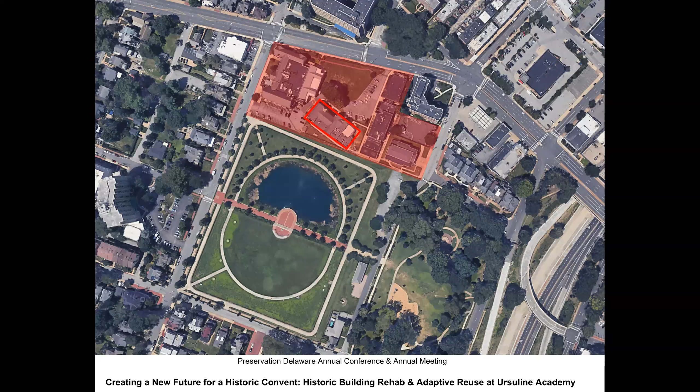The upper school was built in 1927, the building to the left on the former map. Lower school was a 1955-era building. The Montessori program was added to Ursuline's offerings in 1964. The gymnasium and middle school additions were done in the 1980s.

The PAC, the Performing Arts Center building, is a 1914 former Christian Science church that Ursuline Academy bought probably 25 to 30 years ago. They're in the process of figuring out what they need to do with that, what they can do with that.

The Student Life Center itself is a 3-story, 8-bay stucco over brick Tudor building with gabled structured roofs, wood casement windows with brick detailing around them. The west side of the building, to the right of the tree here, was a chapel on the first floor, which has been turned into a library as part of this renovation and restoration, with stylized Gothic cast stone detailing as an accent for that space.

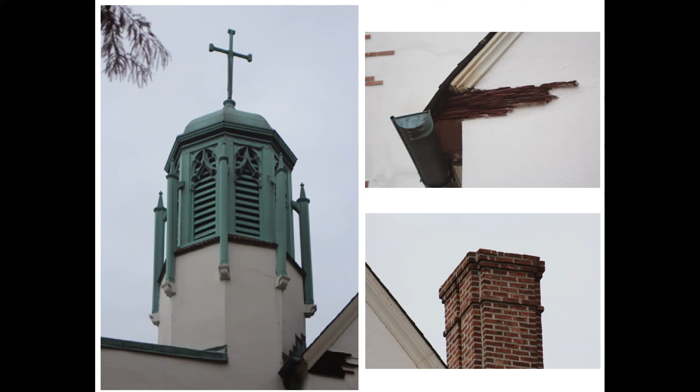Tax credit program eligibility is actually fairly simple. In Delaware, and I don't think this exists in every state in the union, Delaware is one of the states that offers a tax credit program for nonprofits. The standard for-profit tax credit program includes a 20% tax credit locally at the state level and a 20% tax credit at the federal level. The federal tax credit program does not, at least the last I checked, allow participation from nonprofit organizations. I think that's one of the reasons the state has offered this slightly more advantageous 30% tax credit for nonprofits within the state.

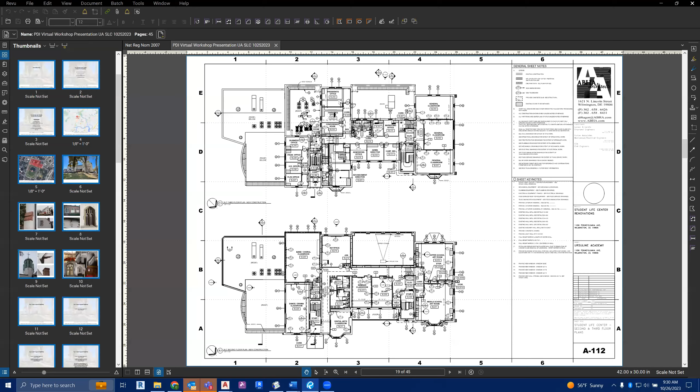Preservation design and approach. I'm going to duck out of the presentation view for a minute so I can scroll around on these drawings. I'll jump back in when I need to.

These are the drawings prepared by ABHA architects for the project. They were the architects hired by Ursuline Academy to perform the services on the renovations and additions.

Essentially everything from this vestibule here to the left of the sheet, with the exception of the band music room which was a 1980s addition, along with a porch that projected off to the east of the existing exterior wall, was the original house that sat on this property when John Raskob bought it and donated it to the Ursuline sisters.

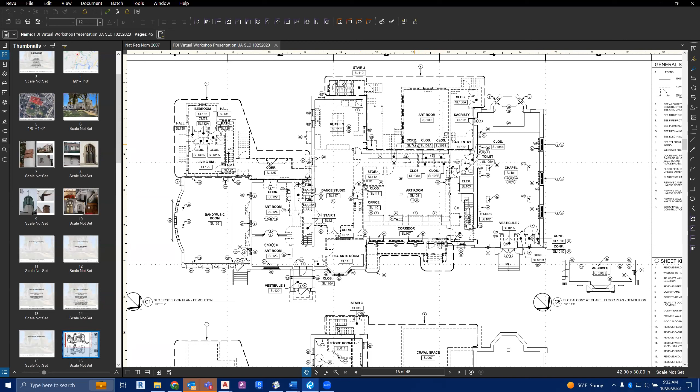You see there are several areas of somewhat major demolition—later additions to the original building. The band music room was probably the latest of those additions; because of its size and location, it was decided to leave that in place. There was a small residence building, an apartment building if you will, to the south of the building that was demolished, and then an existing art room and a sacristy that serviced the chapel were also later additions demolished as part of this renovation project. You'll see a little bit later why that demolition was proposed and accepted by the SHPO.

Not sure why it's not advancing. Hold on one second.

I don't know why it's not advancing now. Technical difficulties abound. There you go.

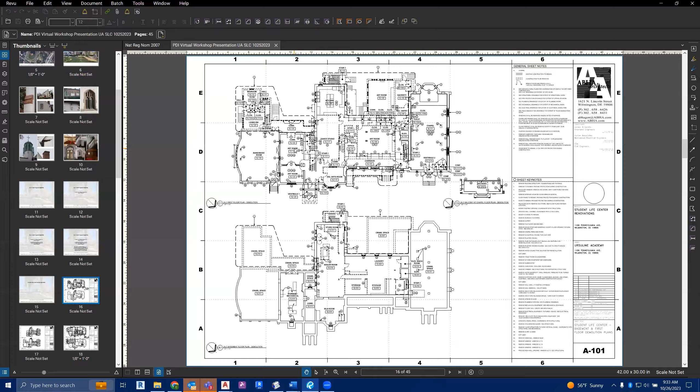The next sheet of drawings from ABHA shows demolition on the second and third floor plans. Essentially the interior partitions were demolished almost in their entirety. The program for the Student Life Center included classrooms, music rooms, and small individual bedrooms or apartment units for each of the Ursuline sisters. We just couldn't reuse them in any way, so there was a fairly wholesale demolition of the interior partitions. The exterior of the building stayed intact as it was, except for those two areas of demolition I talked about earlier.

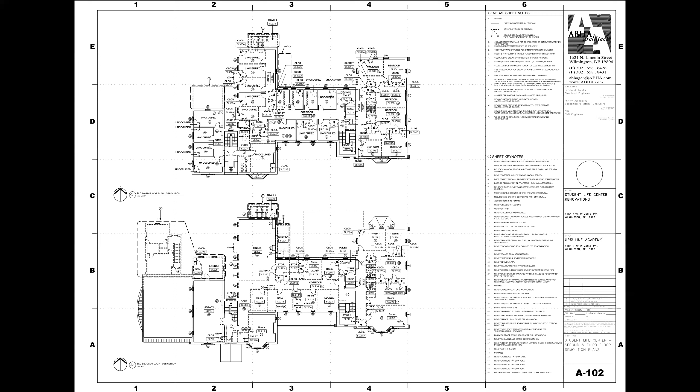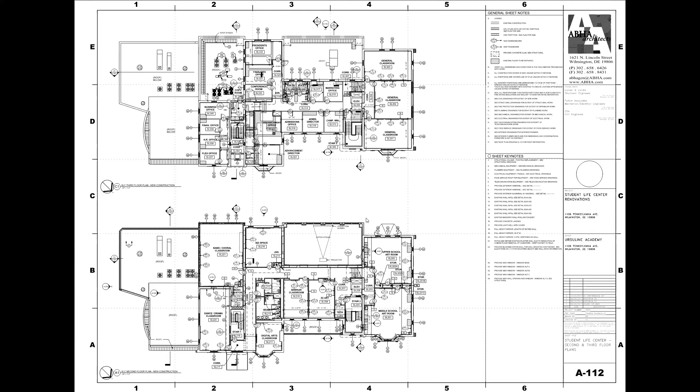They also needed to insert some new toilet rooms to meet current code. It's important to note the stair tower to the west remains, just enclosed now. The stair tower to the east also remains, again just enclosed for fire separation. The corridor between the stair and the other entrance remains in this new design, as it was identified as a key element of the building floor plan.